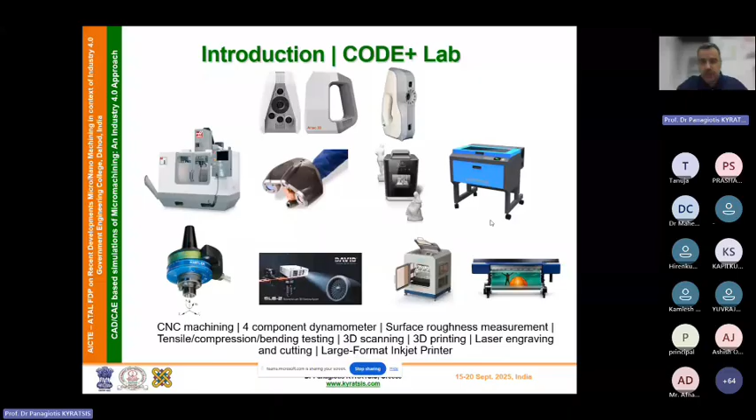We have Esko for packaging design. We use Granta as our main software for material selection, GeoMagic for 3D scanning and processing of the data, Rhino 3D together with Grasshopper. I'm going to show you some of the things that we are doing with this kind of CAD and API use, and further CAD systems like SketchUp and so on.

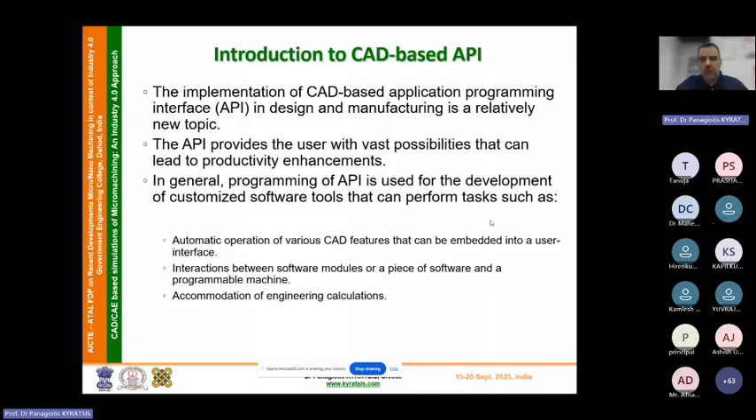And I would say that generally we use it in order to be able to accommodate a number of engineering calculations. It sounds very good to use this kind of technology in such a way in programming the CAD system. And of course, we have a number of advantages, like we enhance the productivity of the designer and the manufacturing engineer. We improve the work and time allocation.

We have a quick and easy error recognition during the product design cycle. We reduce the product development time, and this time that we save, we can use it to something which is more productive from our point of view. We can better implement the design ideas that we have in mind and better handle the product development. So it sounds very good, and probably someone can argue, why doesn't everybody do that?

Because out of all these advantages, we have a number of concerns. The first is it requires understanding of computer programming. And I would say that usually engineers, especially mechanical engineers or design engineers, they don't like programming. So this is some kind of difficulty that we face all the time. Another difficulty is that in some cases, the benefits are not worth the investment in time and resources. We can discuss that later on if you want, when it is worth it or not.

And the third disadvantage is that we have a lack of thorough training guides, tutorials, manuals, and so on. So in a number of CAD systems, the users cannot find the manuals or easy to comprehend materials, or sometimes you cannot find it at all, and you can do it only directly from the help.

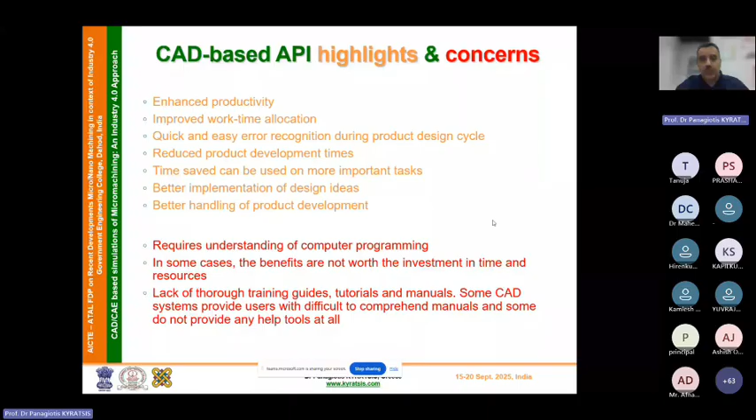So I have split my presentation in different sections. I would propose that after the end of each section, you can have some time to ask me any questions that you might have, and then go to the next one, because I'm going to change the subject and the section quite a number of times.

So at the beginning, I'm going to discuss CAD-based design and manufacturing. We have a tool which we name 3Designer tool. The version that I'm going to present to you now is a very simplified one, just to give you an idea how we use this kind of technology. And of course, we have the full version of this tool that we use for a number of applications. So the main idea is to create different modules that can be combined together in order to build a complete software tool, like the one that I'm going to show you, which is a cut-down version of the total one.

So this tool is a general platform that can aid the design engineers to face the routine design tasks that occur during the product development. And in doing that, we can facilitate time-consuming tasks and then use the time in a more productive way. And it is possible to extend this functionality to cover a number of issues. You will see more about that.

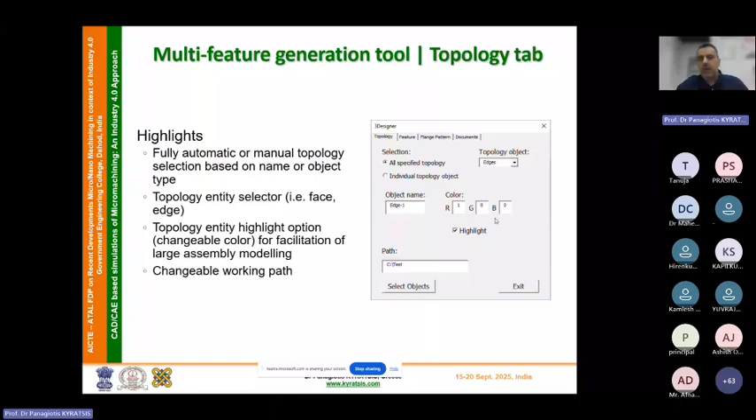So there are different chapters of how we can use the 3Designer software tool. I'm going to start with a simple one. If you go to one of the tabs, one of the things that the tool does is, fully automatically or manually, you can select using the topological names of the object. And then by doing that, we can actually apply a feature of the CAD software. Let's say, for the sake of the argument, you can paint one face. So automatically you can select a face and then you can paint it.

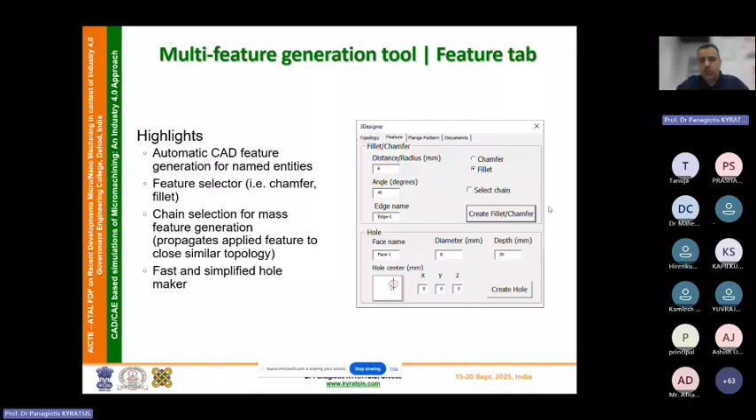There is not something really big about that, but the selection can be a hard procedure sometimes in some of the CAD software that is available. And then after we select these kinds of instances, we can automatically generate different entities like chamfers, fillets, create some holes, and so on. In this case, you can put a number of parameters here and automatically have the output on the model that you create. Like in this case, we can create some fillets and chamfers, or we can put some extra piece of information for opening holes.

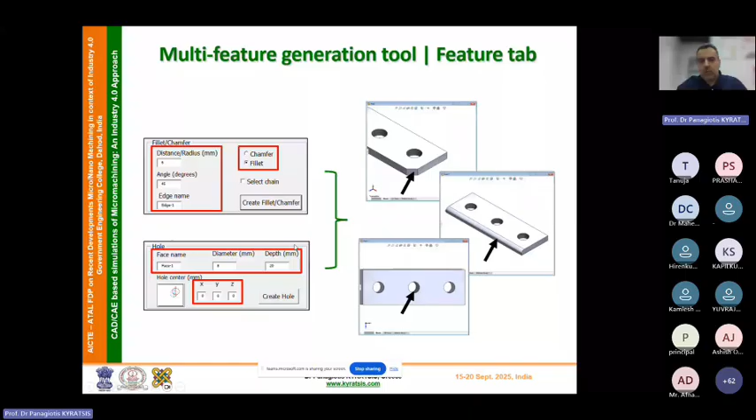But what about if we would like to have something more unusual, something more peculiar, like the flange pattern tab that we have built over here? In a number of cases, you need to build a flange and include the different parameters, or in even more cases, you need to follow some kind of an ISO standard or a standard that you would like to have, and you can select over here the size of the item or the size of the product, and then automatically the CAD is designing it for you.

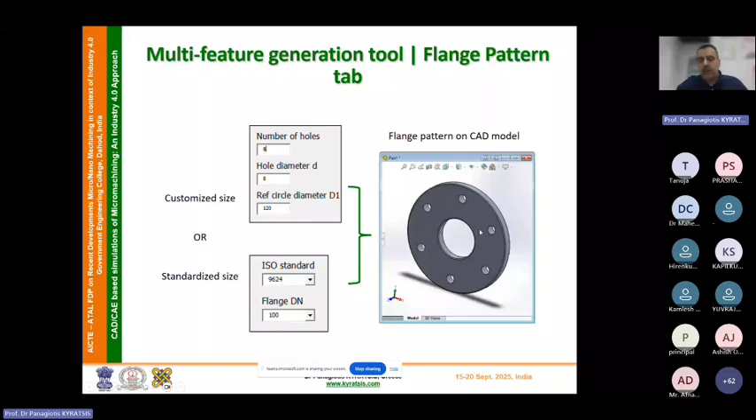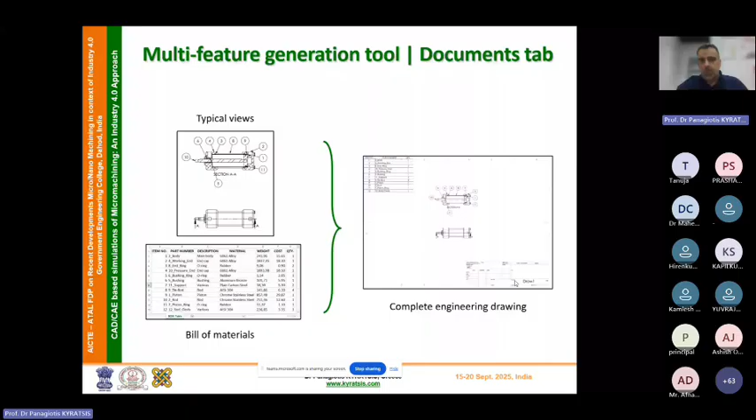So if you would like to ask any questions before I go to section 2, I'm more than happy to answer. Or if you would like to continue with all the sections and answer the questions at the end, I'm more than happy with that as well.

Hello, participant. Have you any question? Yes.

Okay, maybe this section was relatively simple. Let's go to the next one.

What about if we would like to design something more peculiar, something more advanced or difficult, somehow different? In this case, we are able to program using textual or visual language.

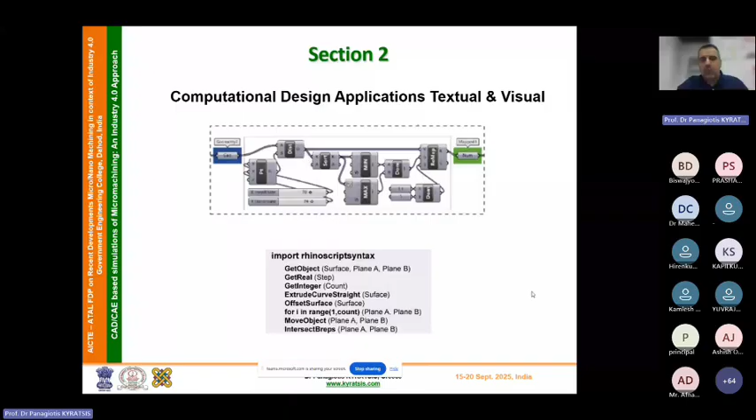I'll go a bit quickly with this, but we can use visual programming, which means that on the screen we have something like this: different boxes with input and output, and inside each box some kind of code. We use a number of libraries, and we are able to build what we call spaghetti here, the whole software. Of course, we are able to use textual language as well.

In our case, in some of the systems, we use Visual Basic for Applications. In others, which you'll see later on, we use Python, again because there are a number of libraries available, and it is very helpful.

And because we are able to use the textual language, we are able to create a new box, a new kind of function, procedure, or object, which is going to be used inside this spaghetti, but made by ourselves, depending on the application we want to run.

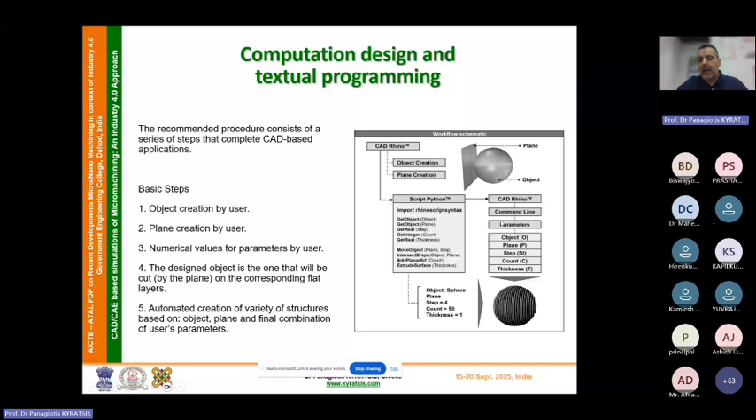I'll give you an example. We have built a small script where, when you have a little object, whatever geometry, it's not relevant in this case, and you have a plane, you declare these two objects, and then you can slice the geometry. We've been using Rhino 3D for this case study.

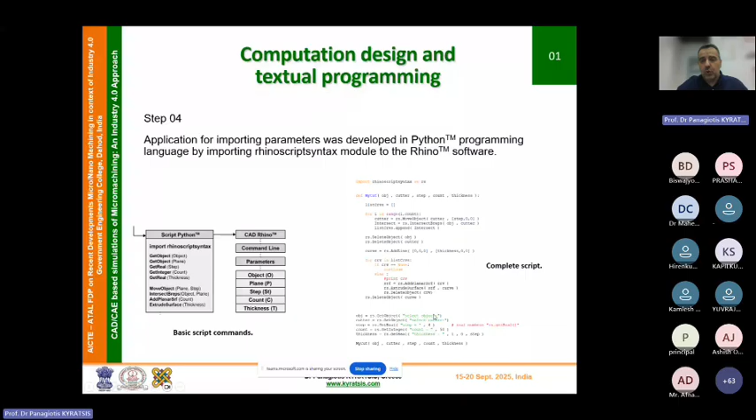We have written a script which does what I'm going to show you later on. The main idea is that you can slice the geometry with different parameters, and you can see the alternatives here on the right-hand side of the screen. This is an application we use extensively, not only for this simple geometry, but for high-level, very complex geometries, usually for the furniture industry.

And then what do you do? You can get a CNC laser cutting or a CNC machining center to cut all these geometries and then assemble the final furniture, if that's what you want.

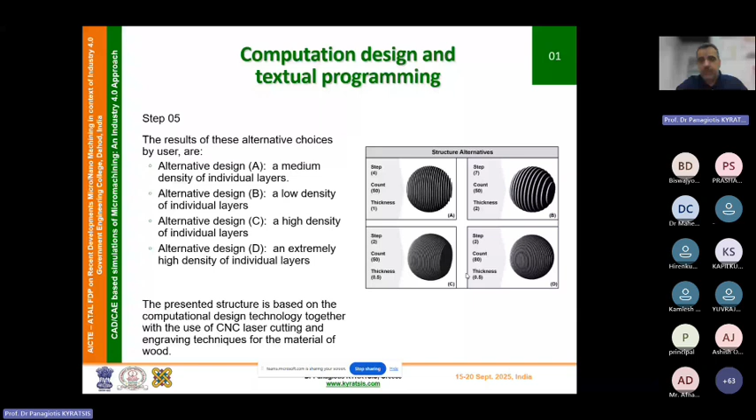Another example: if you have a surface like you see here, with plane A and plane B, the code again is written in Rhino 3D, using some kind of Python code. It takes all these parameters as input, and you get a different output every time. Depending on which one is suitable for you, you keep it.

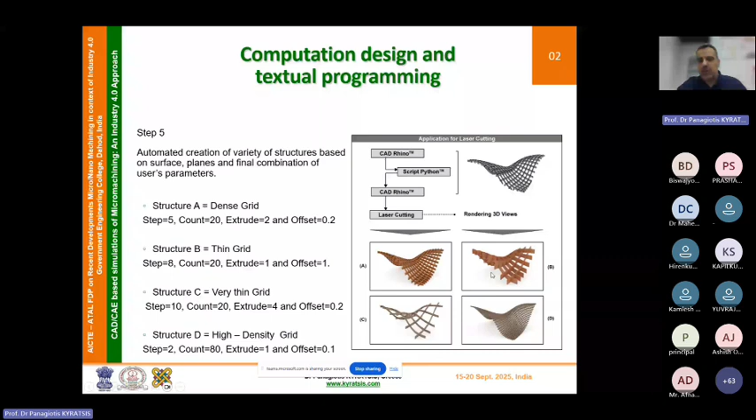For this case, again, we usually have different applications for products made of wood. You can use the CNC laser cutting technique or CNC machining.

And then, going to something a bit different, you have, let's say, a pattern here. In this case it's a very simple pattern. We create a visual code, again using Rhino, with a simple geometry for the sake of the argument.

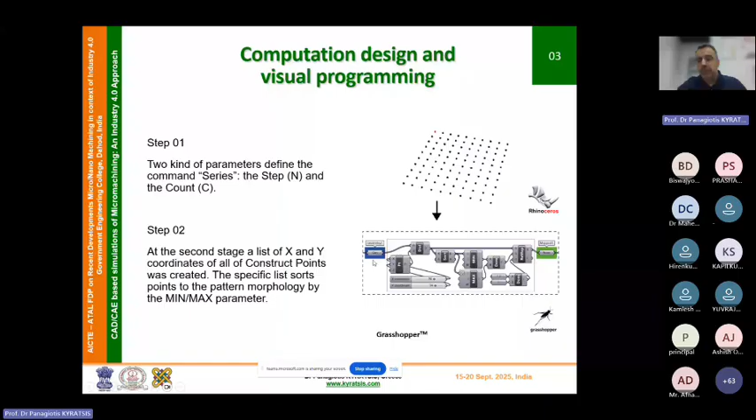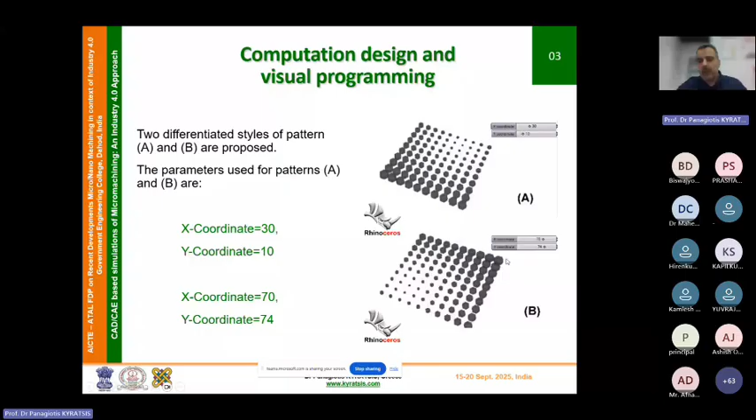Depending on what is the pattern here, we can explore different functions of the size of this geometry, which is going to be repeated. And then at the end, you find yourself having different applications, different alternatives on the patterns.

And of course, someone is going to argue, why do we use that? In our case, we use it for 3D printed plastic structures on textile. So we print alternative patterns on textile, and then you see that like that, we change the geometry and the mechanical properties of the textile itself. This is sometimes called 4D printing, if you would like to have a quick search in the bibliography.

Okay, this is section 2. Again, hopefully it was relatively easy. If there are any questions.

Yes, sir. One question what I can ask: computational design and textual programming can be used parallelly for making the object.

Actually, we started some time ago with textual programming. And then we found out that by using the visual, we had a lot of code ready for us, so it was very easy to handle. Instead of having a lot of lines in front of your screen, we had only a box that you can play with. Then we needed some extra functionality, so we ended up using visual programming to make it easy to see on the screen, while at the same time we use the textual approach to create our own boxes of functionality. Like that, we use both of these techniques in order to optimize the time we need to develop our application. This was a very good question, because we try to combine both of them. It's like a hybrid way to do it.

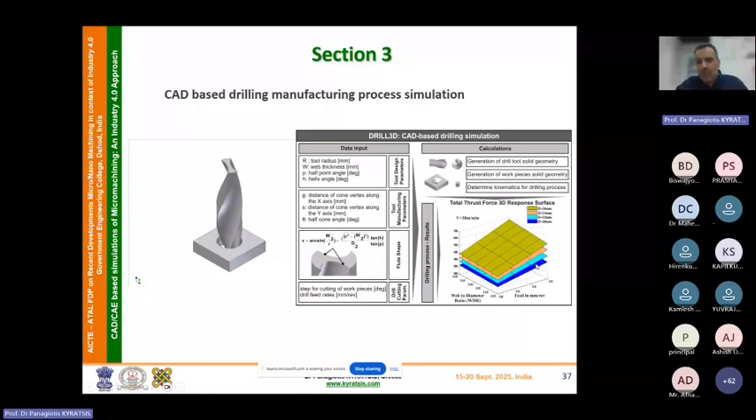By doing all these things, and if we run the software, then we end up with a calculation of the total thrust force in each case, for different tool diameters, for different feeds, for different web-to-diameter ratio, and so on, speeds and so on. So this is an alternative way, and someone hopefully is going to ask me, why do you use FEA and why do you use this technique? You have to ask me later at the end of this section about that.

Let me make some comments about it. Drilling is supposed to be a very common material removal process. Even nowadays that we go from metallic parts to composites, in order to somehow connect them, we need to do the drilling. So it's very important, even nowadays with the new materials that we use.

Unfortunately, the tool geometry is very complex. In this case, which is a relatively simple case of drilling, we have to split the cutting process between the cutting process of the main cutting edges, the lips, which are these areas here, this one and this one.

And then we have the chisel edge. The chisel edge is over here, on the kernel of the tool. And then we have the flute, which is over here. It's the area of the tool that the chip goes along in order to be removed away from the workpiece.

Traditionally, researchers have started with mathematical simulations or experimental simulations. So in our case, because we like programming in CAD software, we will use the API of a general purpose CAD system, and you will see how we handle this kind of problems.

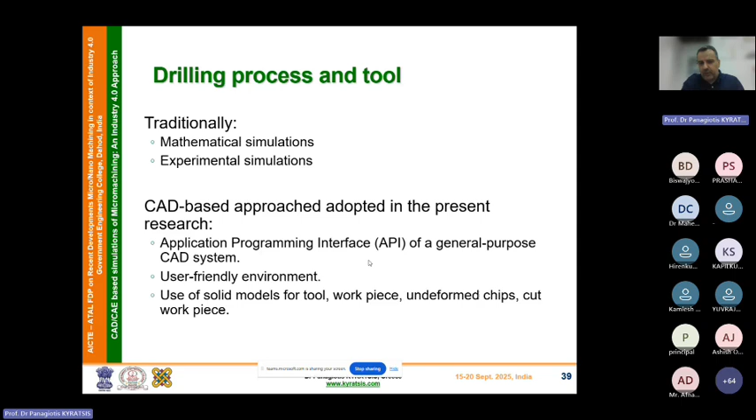Hopefully you will find our user-friendly environment, and everything that we create during this simulation are solid models - solid model for the tool, solid model for the workpiece, the undeformed chip, the cut workpiece, everything is a solid model. This is not the case all the time; we can do similar stuff by working with lines or surfaces. But in our case, for the sake of this specific simulation, we have been using solid modeling.

So we have to insert these, and one additional difficulty is all these are distances which can be found with some difficulty in the reference books. We have something like that on the screen. As you can see, we have the tool geometry and the manufacturing parameters.

Over here we have different values - how many steps should the simulation do, what is the step depth, and so on. In this case, we needed to run a lot of simulations until we optimized the number of steps and the millimeters of the depth. The same is true for the main cutting edges and the chisel edge over here, and what should be the step in degrees of the rotation of the tool during the simulation.

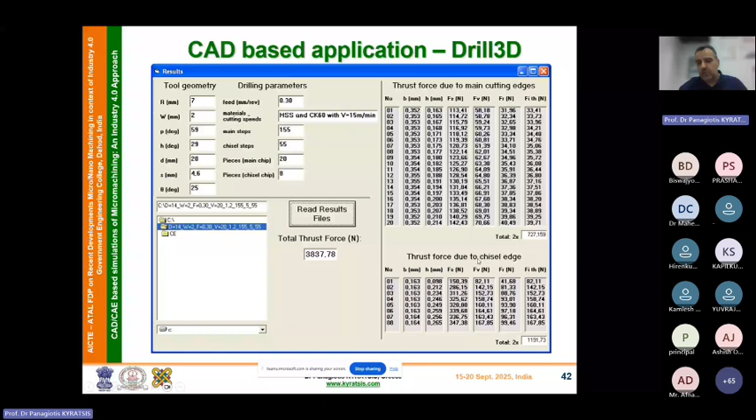Let's see a bit how it works. We put the input data as described earlier. We have the calculation of the tool itself, and we have the workpieces, and we determine the kinematics of the drilling process. Then we penetrate - we do the penetration of the tool inside the workpiece - and because it goes inside, we have to apply a Boolean operation, which means that in the area where we have a common volume of both the tool and the workpiece, we can have what we call the undeformed chip. This happens for the main cutting edges or the chisel edge.

I will concentrate a bit more. You can see over here the drilling tool, which goes inside the workpiece. There are a variety of parameters. When it goes inside, and after some time, in order to be able to achieve a steady state simulation, we are able to cut this undeformed chip, as you see it over here.

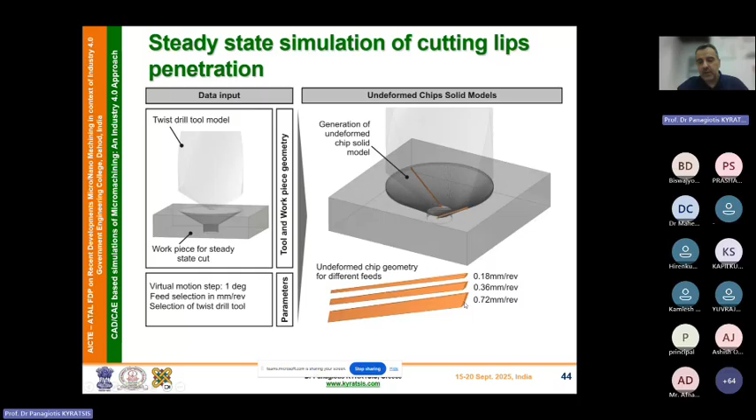And depending on what is the feed that we are using, you can have different variety of dimensions on the undeformed chip. This is for the simulation of the cutting lips penetration. Let's see now the little video, which is going to be more understandable for you, I suppose. You see, it penetrates inside the geometry, the tool, and then creates the hole.

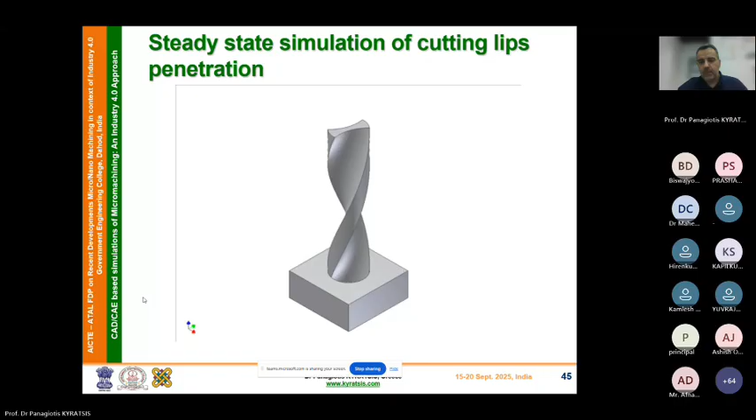The same happens if we go to the chisel edge area, because this little cylinder that you saw earlier on, it's only for the chisel edge here to cut, and as it penetrates inside the geometry of the workpiece, then after we achieve the steady state simulation, we are able to see over here the undeformed chip.

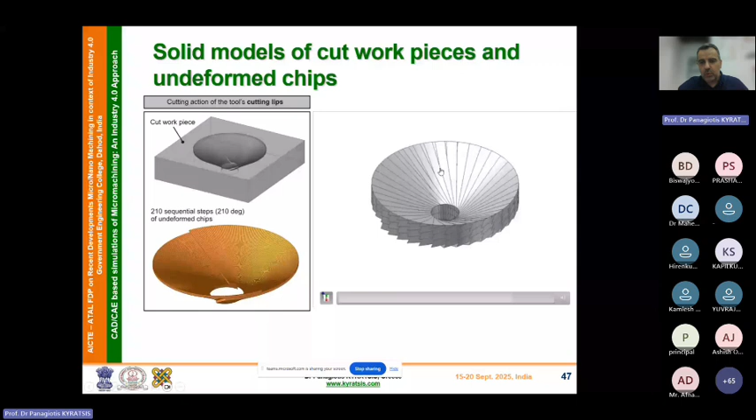And why this is very important, you saw that over here, depending on the parameters, we have to optimize the degrees and so on, which are probably details for you at the moment. But I have prepared some videos over here. If you think about the undeformed chips, how they are removed from the workpiece, there is this little video. After the tool is penetrating inside the workpiece, this is what you subtract every time. And then the same is the case for the chisel edge area.

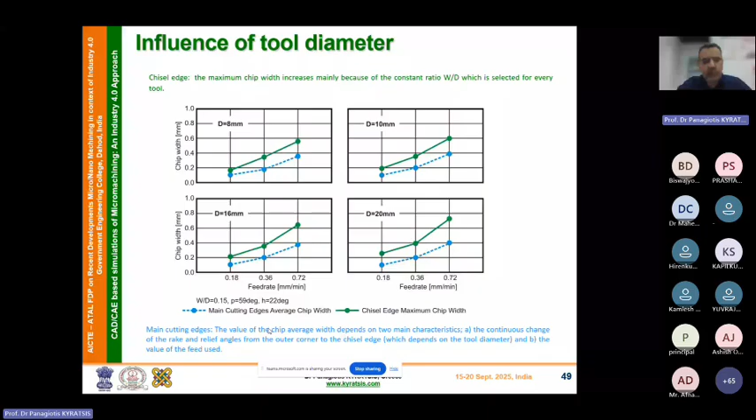And then we are able to automatically calculate the size of the chip, the undeformed chip. And you can see over here with the green, we have the chisel edge, and with the blue, we have the main cutting edges. And depending on the feed rate, we are able to calculate the chip width depending on the diameter or depending on the web thickness.

And when we talk about the web thickness, it is how big is the center, the kernel of the tool, and some manufacturers wanted these to be very thick, very wide, but in this case, you need higher force in order for the drilling to happen. If it is very small, then there's a high possibility for the tool to break. So somehow over here, you need to do a compromise to have a web thickness which is thick enough to withstand the load, while at the same time, we have lower forces for creating the drilling, creating the hole.

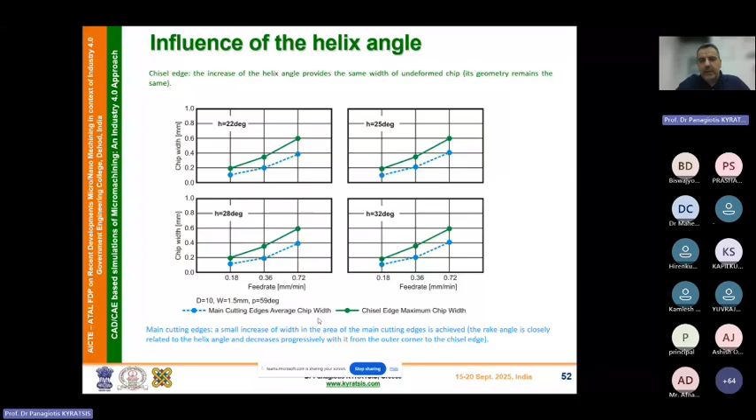The same, we have the results for the half point angle, the nose of the tool, again, similar results, or the helix angle. If we change the helix angle, then we have a variety of geometries of the chip. And someone will argue, why do I need the chip? So now it's a surprise, because in order to be able to calculate the forces, to do the simulation, we need to have the dimensions of the chip and then apply what we call the Kienzle model, the Kienzle formula.

This Kienzle formula, I have it over here for you, for your reference. It has the dimensions, B and H are the dimensions of the undeformed chip. And there are two coefficients, K and Z, which usually you find in a database, and they relate to different aspects like material, manufacturing parameters, and so on. So in our case, we are going to find the dimensions B and H, while at the same time from the database, we can get the K and the Z in order to find what is the force.

And then to be able to find over here, what are the forces on the lips here and there, and what is the force over here on the chisel edge. So after we have these, you see that we have cut them into pieces, and we calculate the different B and H every time, and then find the Fi thrust of this little specific undeformed chip. If we go up to the end, we will be able to calculate all the thrust forces here and then sum them together over here. And because we have two cutting edges, in this case we have to multiply it by 2.

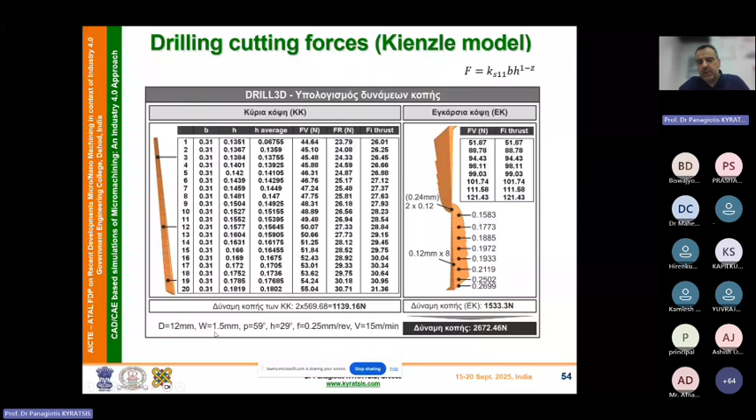So this is the end of this section. Hopefully this was a bit more unusual for you. If you have any questions, you have to ask me why do I use CAD-based simulation instead of finite elements.

Okay, the simulation, the CAD system that we produced, the Drill 3D, was part of Inventor of Autodesk. So we program it in Visual Basic for Applications of Inventor. For the composite materials, as long as we have this database, as I said, we have to apply the Kienzle formula. As long as we can find these kinds of values in the database, we can do it. The Kienzle at this stage, usually they use metallic parts, like different metallic parts. Nowadays, yes.

Just I have also one question. Sir, when we make this simulation, during the modeling of the twist drill geometry, are we considering the reduction on the flute length? Because that affects the generation of chip friction between the chip and the flute surface.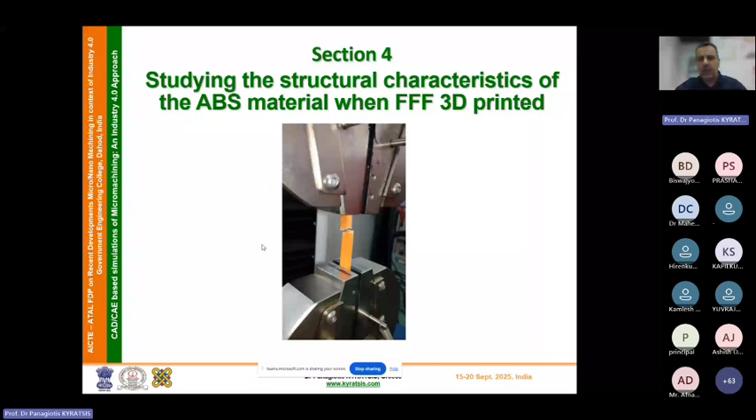In this case, probably this is something that all my colleagues and my students like, 3D printing. So what we try to do nowadays is study the 3D printing properties. For the case study I'm going to present today, we have been using ABS, which is an ordinary material, with an FFF printer, and try to see the structural characteristics of the geometry. Let's see how it works.

So we have been using ABS, and in order to study it and make the model of it, we use a shallow neural network. So again, over here, we come to CAE in a different way. Someone would expect to see finite elements only, but this is a different CAE way of modeling. And the whole goal here is to investigate 4 structural parameters on the generated S to M ratio.

And what do we mean with S to M ratio? Usually, if you search the topics of this area, you will find that people do tensile testing and get the strength. In our case, we took the ratio of strength divided by the mass of the item, because apart from having the manufacturing parameters for high strength, sometimes we need to have the lowest mass possible with a higher strength. So you see that these two results contradict each other, and this is very interesting. That's why we got this S to M ratio.

We used the design of experiments technique, and for this we used the central composite design. We had 4 structural characteristics, and for each characteristic we had 3 levels. By following this CCD algorithm, we needed to perform 31 tests. And in order to see that we don't have any problems with the testing, each test was measured twice, to see that the result we get appears well both times.

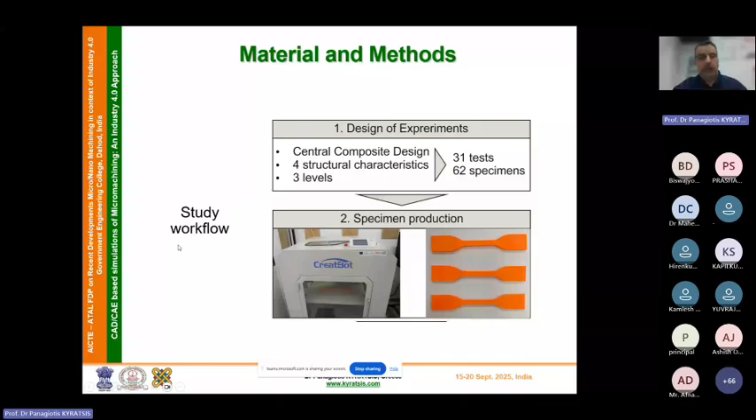We have all the specimens over here. We'll see later on that we measured the weight of each specimen, and then we did the tensile test. And then we study the workflow. We have all this neural network modeling with this hidden layer. Over here, we have the 4 structural parameters; we'll see them later on as well, and we have 3 levels to each. And over here we have what we call the constant fabrication parameters, and these are the structural parameters that we were changing.

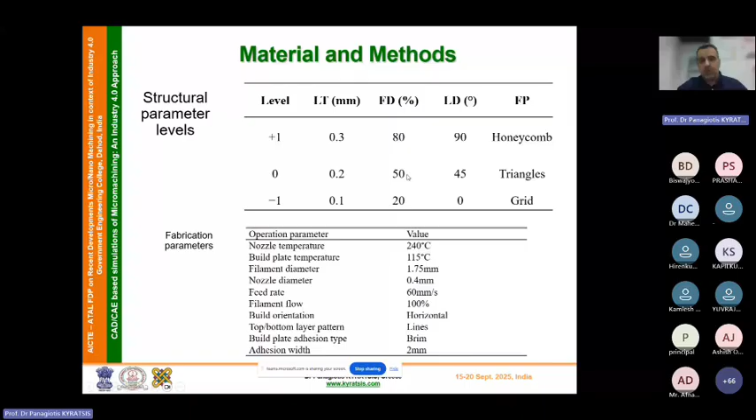The specimen had a geometry following the specific standard for the dimensions. Here you can see the different values of the layer: 0.1 millimeter, 0.2 and 0.3, and how this appears on the screen when we create the model and the code to be manufactured on the 3D printing machine. We have the infill: 20%, 50%, and 80%. And you can see over here the difference in the geometry which was built before testing.

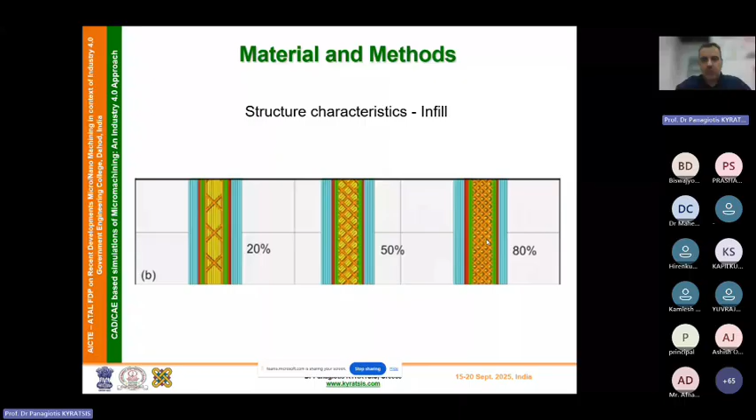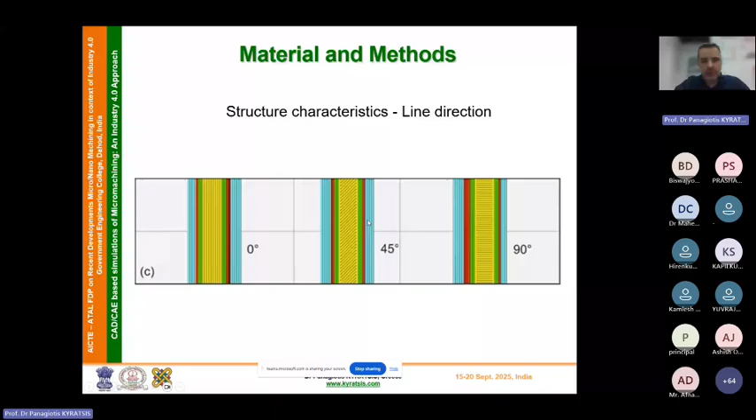Then we have the line direction: 0 degrees, which means printing along the testing specimen, or 45 degrees, or 90 degrees. I will tell you the results later on, but someone would expect this to be the strongest, this the second strongest, and this the least strong. And then we have different patterns. We tried grid, triangles, and honeycomb as different pattern structures.

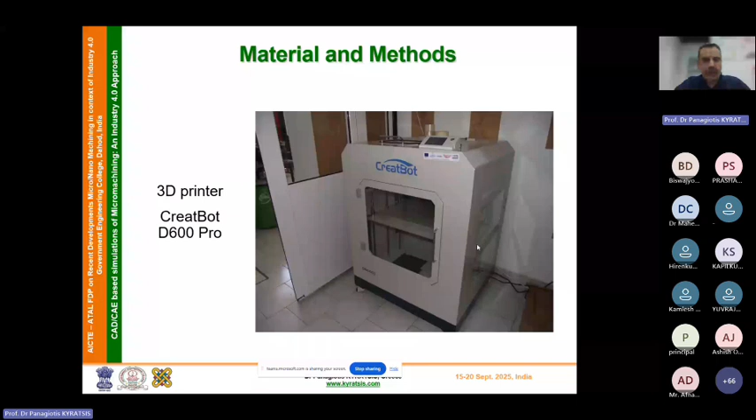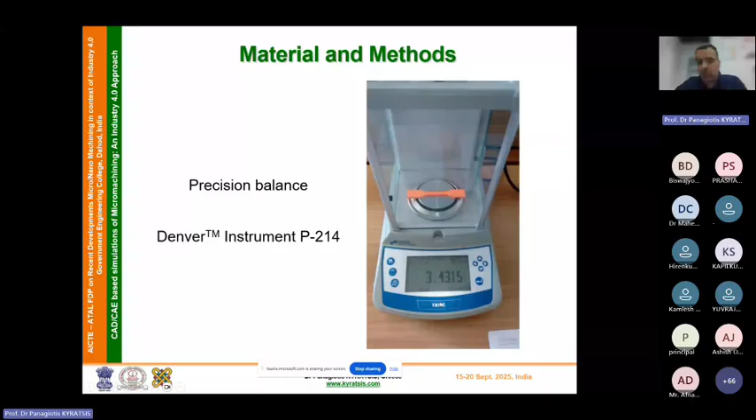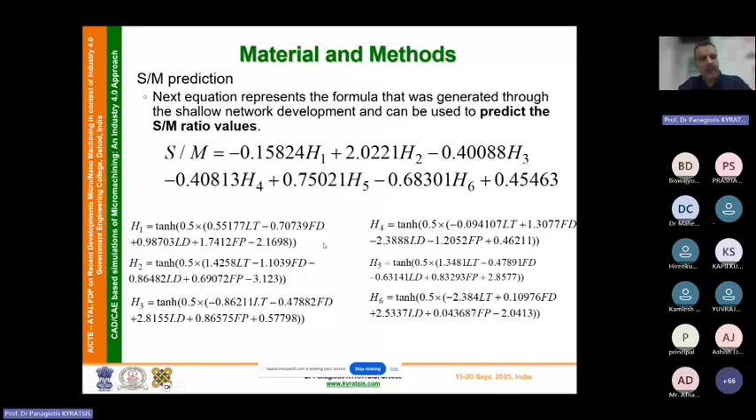And then some trials over here. As I said earlier, we measured the weight of each specimen with very high accuracy. Then we built a neural network. We decided which one was best compared to the R value over here, selected it, and built the neural network. We did some normalization of data; I'm going to skip all this. We create the function, and each function has some coefficients; you can see them over here. I'm sorry. And then we did the network evaluation for the training, the validation, and everything.

So the conclusion is that the layer thickness is the most influencing factor; we saw that on the graphs earlier. The direction of fracturing is directly affected by the line direction. As I said when presenting the parameters, 0 degrees is responsible for higher S to M values. And the influence of the infill density indicates that both 50% and 80% have almost the same influence. You saw it over here.

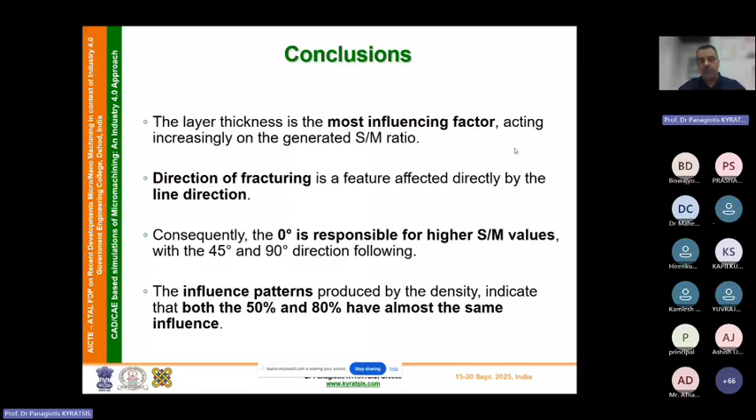And then the general conclusion is 20% density contributes towards the achievement of higher S to M values. The honeycomb was determined to be one of the yielding the highest possible S to M ratio. And finally, the results of the neural network model was very accurate, up to 1% of difference. The error was very small, up to 1%.

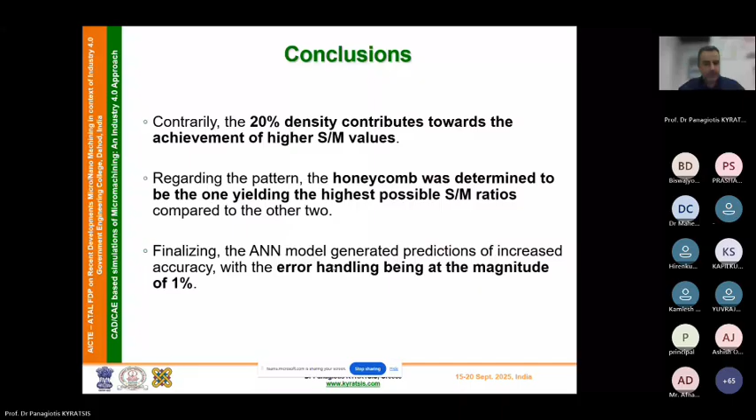I'm sorry. So if you have any questions now, I think we went to something which is a bit more fancy, a bit more, I don't know, what you would expect me to say in this presentation. If you have any questions, or you saw the finite element that you want me to go further with that.

We haven't tried to compare different design of experiment methods, but it seems like up to now, every time we have been using different methodologies, we achieve very good results. But maybe this would be a very nice opportunity for us to check the comparison with the same experimental results, to check the different design of experiment methodologies. It's a very good idea. I'm sorry, we haven't checked it, but it's a very good idea for future work.

Okay, probably there are no other questions. Okay, let's go. It's something which is a bit more fancy, but it's more difficult. Let's see how do we connect CAD-based programming with nonlinear finite element machining. Okay.

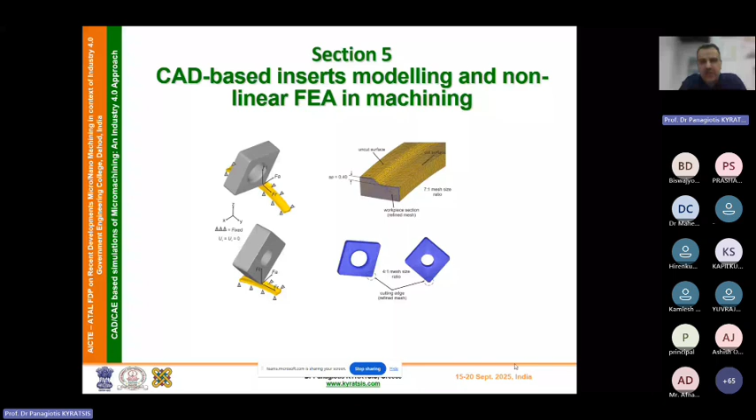This is the layout of an application that we have built based on a specific standard for turning inserts. And then you will see later on how we can change all these parameters to create different inserts. So in this case, we use different geometric parameters for creating turning inserts.

This is an insert. If you go over here and you actually zoom in, you will see that there are some chamfer width and some chamfer angle. And then we can use that. Again, we have different geometries. These are more micro geometries, and these are more general geometries, angles, and so on.

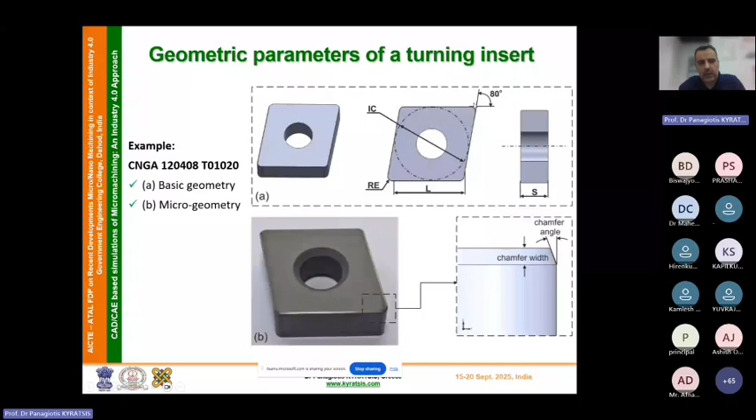And what we have done is we use SolidWorks API, which is mainly a VBA kind of application, in order to parametrically design the turning inserts. And these turning inserts were based on this specific standard, as you see over here.

And when you have this application here, there are a lot of buttons to press, but generally speaking, what we do is we have to select over here what kind of shape and length we would like, what is the thickness, the nose radius, the clearance, the clamping system, and so on. We have over here some cutting edges and so on. There are different variety of inputs that we need to put, and you can see over here all the alternatives that we can select in order to produce a specific turning insert.

And of course, we can save it in different formats. In a number of cases, we prefer to have it as an STL. And then we can over here say where to be saved in order to find it. And then you can just click Design Insert and you have it. And you have over here the code, with the colors. Let's see a little video, how it works.

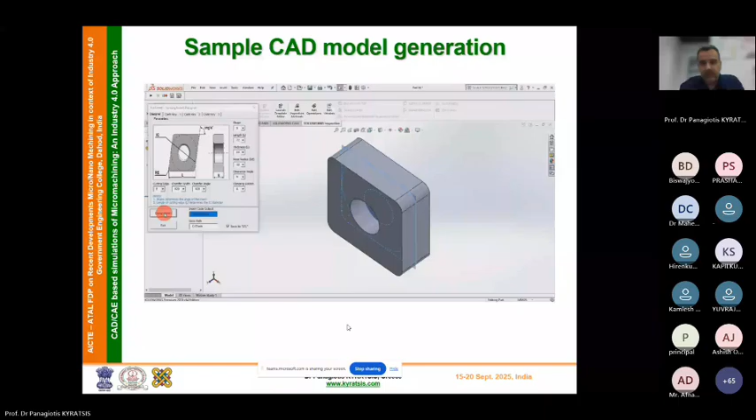So, okay, we have these applications that create FEA-ready turning tool models. And then what do we do with these models? In our case, what we do is we import them into Deform 3D. This is a piece of software that I told you earlier on. You can Google it. It's very impressive to have this kind of software.

We have been using that for a number of years, and it's quite accurate. It needs a lot of experience in achieving accurate results. But at the end of the day, we can actually generate FEA models based on the parts that we design with the application that you saw earlier on.

So the result is something like that if you use it for turning. So again, turning is one of the most common machining processes used to produce parts, especially axisymmetric parts in the industrial sector. Accurate prediction of the generated machining forces is a key factor that can lead to cost reduction.

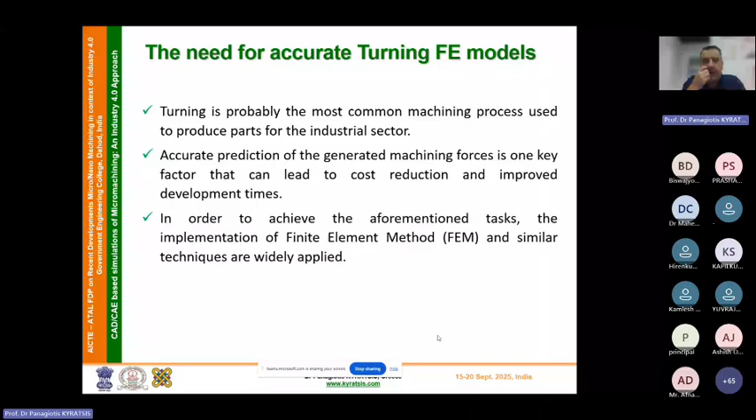Not only cost, but at the same time to have a better quality of the surface produced. And in order to achieve the aforementioned tasks, the implementation of finite element methods and similar techniques are widely applied. And this is what we're going to do.

So we can follow two paths. A 2D analysis is usually very good when we have some analytical rigid parts, and we can reduce the calculation time. It simplifies the mechanical problem and is ideal for preliminary simulations. In our case, usually we go for the 3D analysis, although on a number of occasions we have done a lot of 2D analysis in order to find some parameters that we need for the material.

But generally speaking, we would prefer to have the 3D analysis, which produces results closer to the real condition at the cost of computational time. It uses the full geometry of a tool and is ideal for complicated simulations, especially when we go to all these machining kinds of processes. In our case, I'm going to show you some turning process.

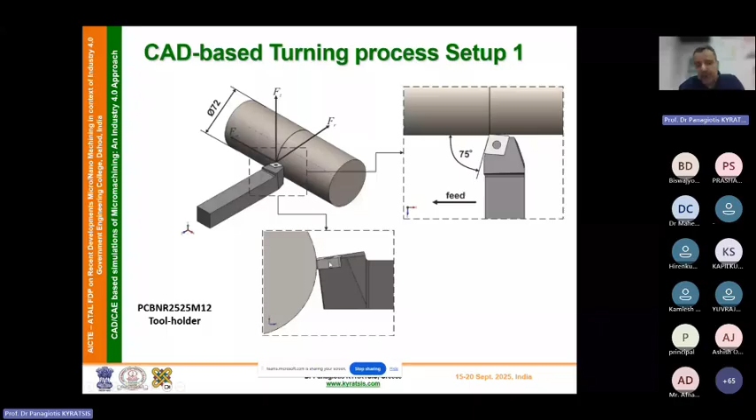You can see that we have a specific tool holder, while at the same time over here we are positioning the insert designed as I showed to you earlier on. And then in this case we can have another piece of insert, and again the holder. We can keep the same holder in this case if we have the same insert, or change it. You will see later on.

In our case, we have a cylindrical workpiece with a diameter of 72 millimeters, and our aim is to calculate different forces. And as you will see over here, we have different tools and different holders. Generally speaking, we'll see that this tool is square and this one is rhombic. And we will try to compare using one or the other, what is the advantage and so on.

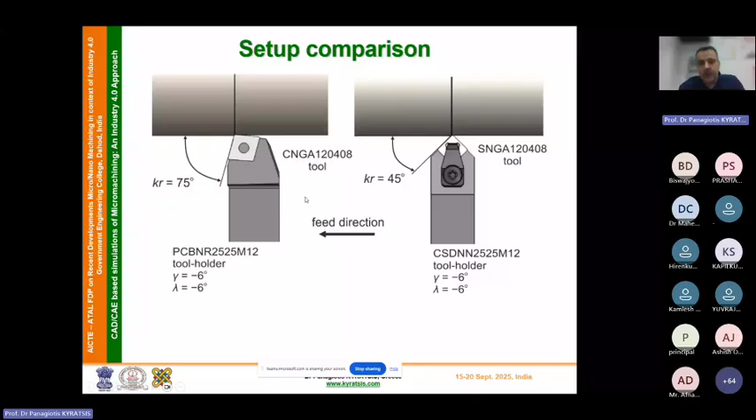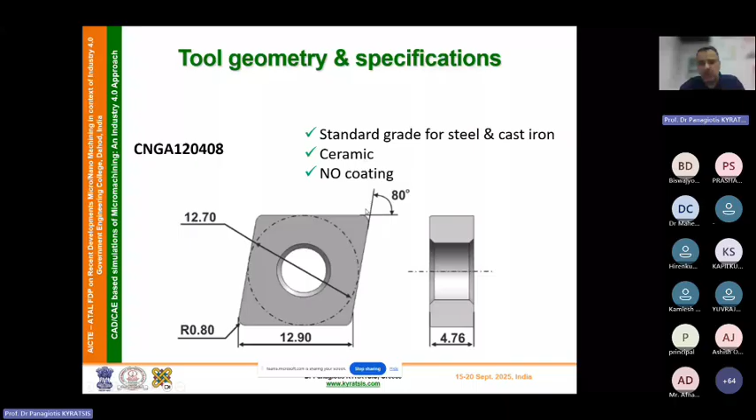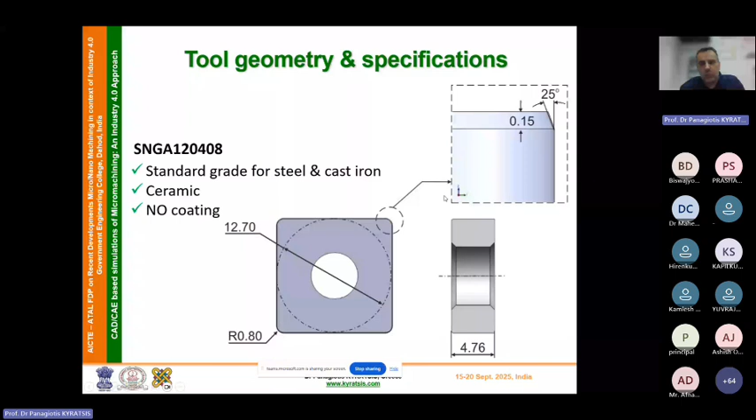So in this case, you will see that we have this rhombic tool. We have all the dimensions. This is a no-coating ceramic tool, and it is designed to deal with standard grades of steel and cast iron. And these are the dimensions as you see them over here, following a specific standard. There's a similar geometry over here with a lot of details, these micro details, about the square tool. And then we have the different tool holders.

And let's go to the workpiece specifications. It's an arc-shaped part of a cylinder. You will see on the next slide what I mean by part of a cylinder. The material is the one that was specified over here. The cylinder diameter is, as I said earlier on, 72 millimeters. But this is the one that we are using. If you see macroscopically, this would be the workpiece that I would like to have.

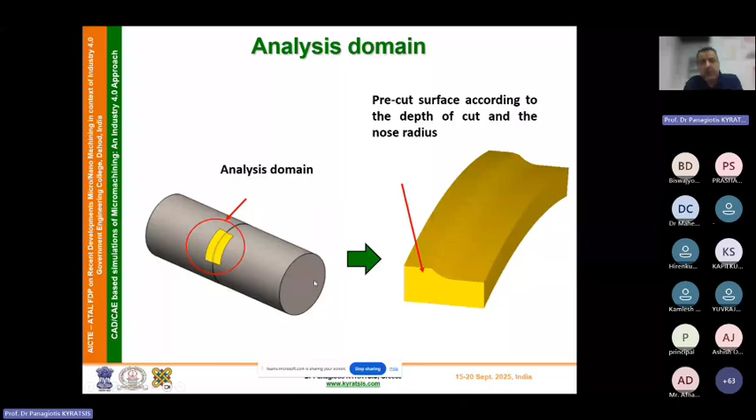But instead of having all this, since at the end of the day the tool is going to cut only in this area, instead of meshing the whole geometry, I'm getting this little yellow part, having it over here, and actually cutting this area using the finite element method, and then seeing the results, instead of meshing this whole very big geometry, which is not going to be used during the cutting process. And here you can see how we develop the chip in this case and the other case, together with the forces.

Again, over here you see that the depth is 0.4. I'm going to mention it later on. In this case, we have specifications like the rigid tool meshed with approximately 50,000 tetrahedral elements, the finer mesh at the tool nose having this 4:1 size ratio. We have a plastic workpiece, arc-shaped, part of a cylinder with a diameter of 72 millimeters.

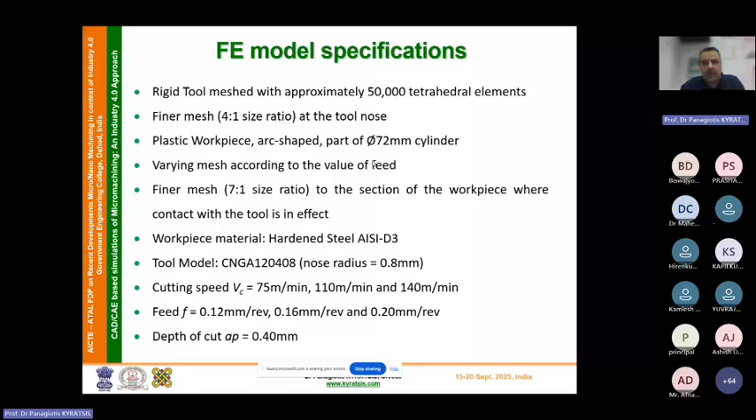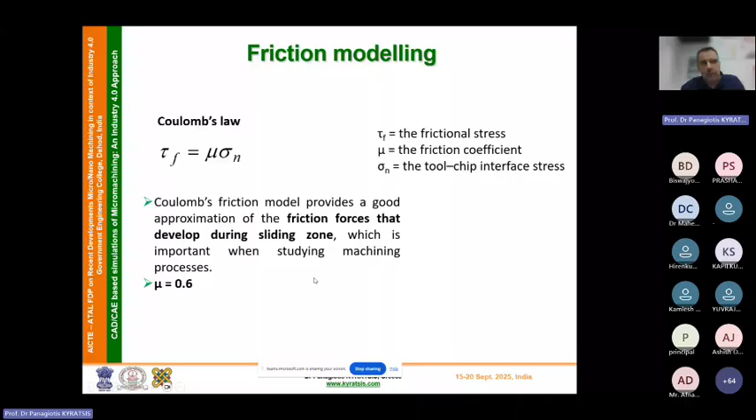What about the boundary conditions? The workpiece was fixed in such a way so that the velocity of the nodes for X and Z axis was equal to 0. The tool was allowed to follow the path - you would expect that angular part, this cylindrical path, as I showed you earlier on. Something very important is the heat exchange with the environment, so boundary conditions were assigned to all the surfaces of the workpiece, so all of them were exchanging heat with the environment. And the master-slave contact relationship was set to the workpiece and the generated chips.

So I'm going to show you first what is the simulation. You see the different steps every time of both the tools, the rhombic and the square, and you see the different steps. For those who are a bit unfamiliar with that, each step is running the model, the FEA model, again and again by changing the geometry. Usually when you use finite elements, linear finite elements, it means that the geometry has relatively small changes.

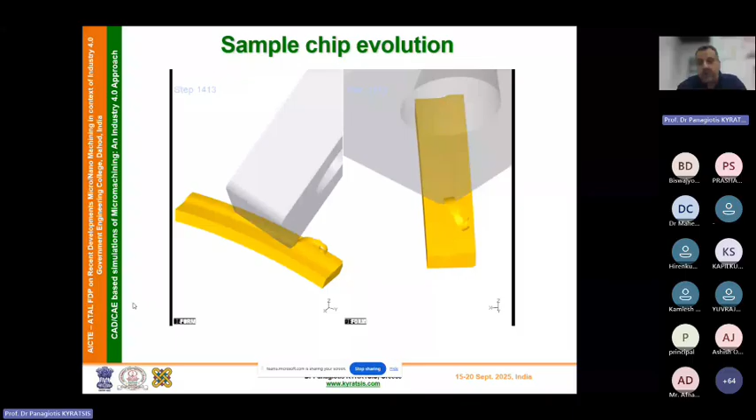In this case, where we produce the chip, you see that we have a very large deformation. That's why the software needs to stop, regenerate the mesh based on the new geometry which changed, and then remesh and solve the problem again. So someone would expect over here that 2,000 times the model was remeshed and resolved again and again in order to produce this simulation.

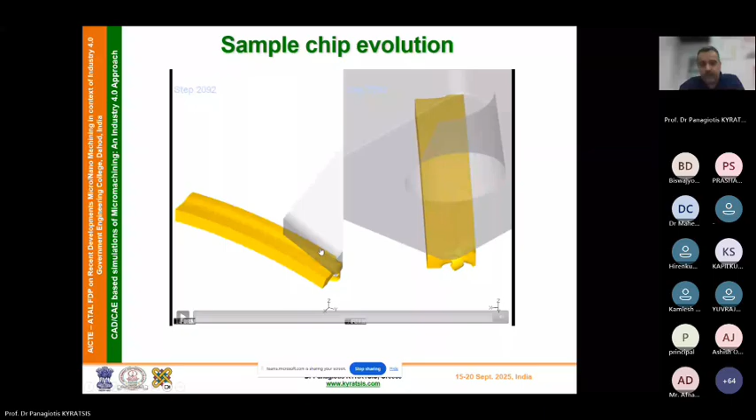I have saved some of the images over here, depending on the tool that we are using, different steps all the time, and you can actually see what you saw earlier on the video on the moving simulation. You can see over here how the chip is developed on the different steps of the simulation, so you see the chip morphology. In our case, usually we do the same experiment in our own machinery here, and then we see that it's exactly the same, or we get the feeling of it.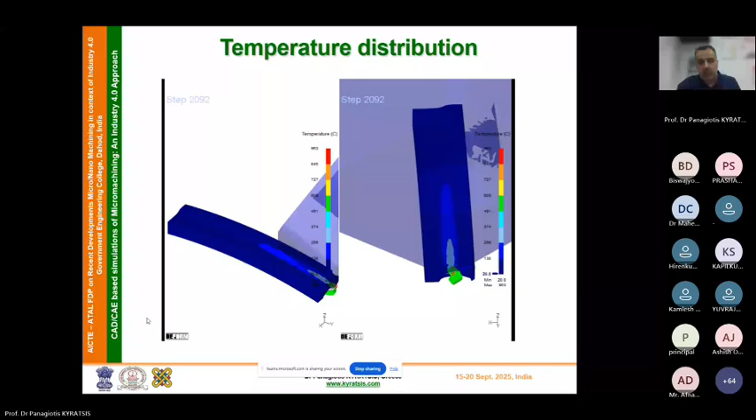Again, lots of steps, 2,000 steps in this case again, and you could actually see how the chip was removed. And again, over here we have some pictures of the simulation in the different steps with the temperatures for this step, depending on the velocity and so on.

And then that's why we have some results, some conclusions: the radial force is the component that affects most the resultant cutting force for both tools. The developed machining forces are higher when using square inserts. So by comparing all these, this is some kind of the result, the outcome of it, with the exception of the feed force, which is about the same for both cases. Increasing cutting speed decreases the percentage of increase, whereas the same effect applies with a feed increase. The temperature distribution seems to be spread to a larger surface when rhombic tools are used. And finally, both rhombic and square inserts produce approximately the same temperatures when we have identical cutting conditions.

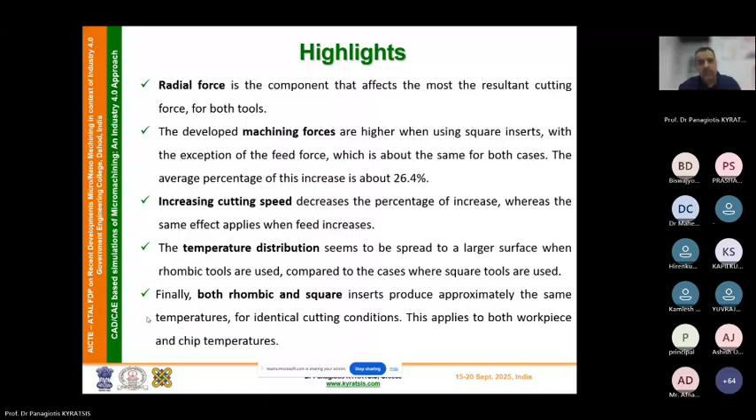It would be a very good idea to start playing with mesh-free FEA tools. We haven't done it up to now. We have put a lot of effort into using Deform 3D because it's one of the tools that took us quite a lot of resources from our laboratory. It was relatively expensive to buy and to maintain the license, so we try to make the best use of it. From this point of view, we haven't tried this mesh-free FEA approach, which would be very interesting, I suppose. I have seen in the literature some results that seem to be accurate enough, but I don't have any experience in doing that.

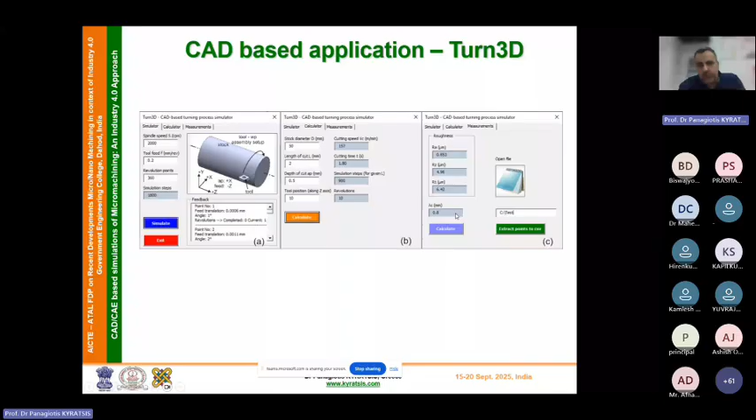By doing all that, at the end of the day, you end up with the roughness. How is it possible to get the roughness? I'm going to show you here. Let's say that we have this little bit of the cylinder, and then we have the tool over here.

And then what do we do? We move the tool around, and then start subtracting the geometry from the area of the turning of the cylinder by doing the turning. And you see over here what is the profile that you will get at the end, and you can see the topography as well.

And you can measure different parameters for surface roughness. You do that on the CAD system by subtracting the geometry of the tool, in this case the insert, from the workpiece. By doing that, you get at the end this kind of geometry, and you have all these measurements, which you can save at the end as values saved on a text file.

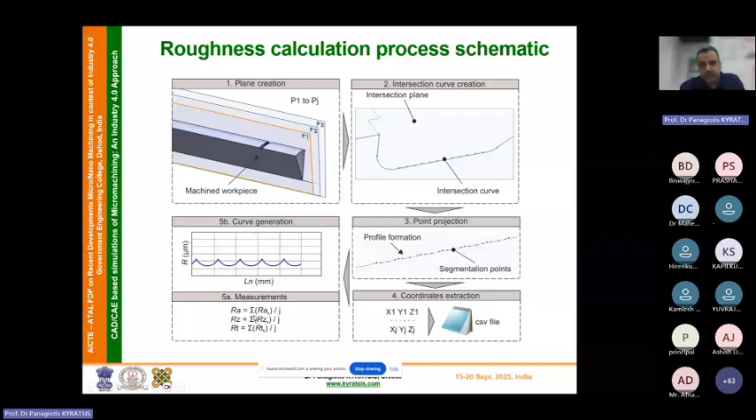As you will see, you can do that with a variety of different inserts. So as long as you have the program to create the inserts, and the program to move the insert around the cylinder—which we are not actually using, as you saw earlier, we are using only a piece of it—we are able to combine both CAD-based applications in order to solve the roughness.

And then, because I'm going to have the same question later on: how do you verify what you have found? We go through creating samples experimentally. We cut some samples and then measure them. As you see, we create the samples, then measure them and get the values.

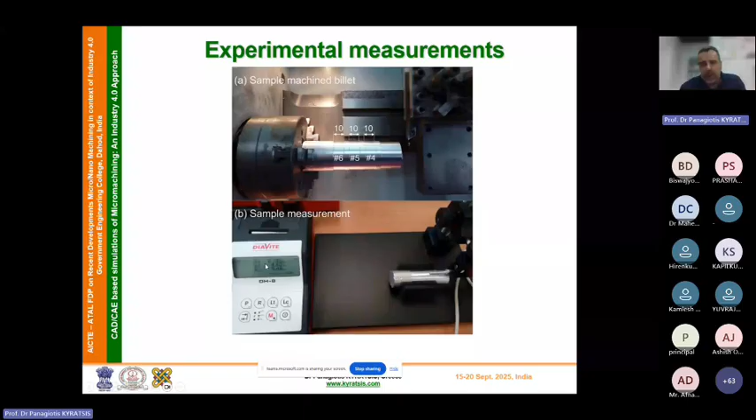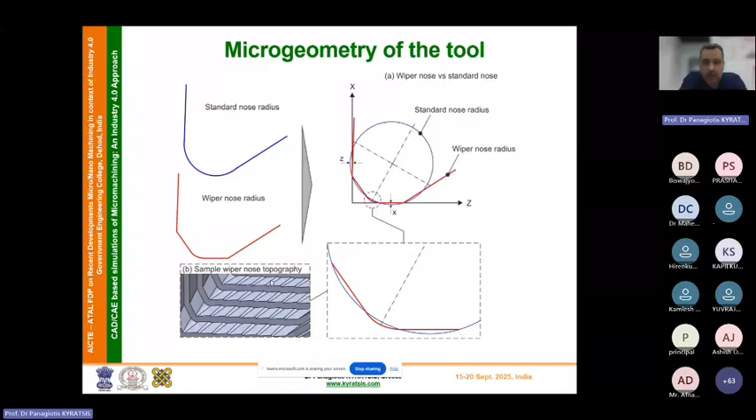And then if you go to the microgeometry, you can see the tool, depending on the nose—if you want the standard nose or the wiper, and so on—you get at the end a different topography. Like if you use a wiper nose radius, the topography is quite different. But again, this is part of making the CAD system and all these Boolean operations work for us in order to do all the maths.

So an alternative way to calculate the surface roughness using a CAD piece of software. Any questions on that?

Okay, I had prepared the presentation up to here for what you would expect me to show you, but I have more chapters because I see that we have 10 more minutes. If you want to go through something closer to 3D printing applications, and how we use CAD-based programming for 3D printing, we can go through another application, or if you'd like to stop because time has passed, I'm more than happy to stop.

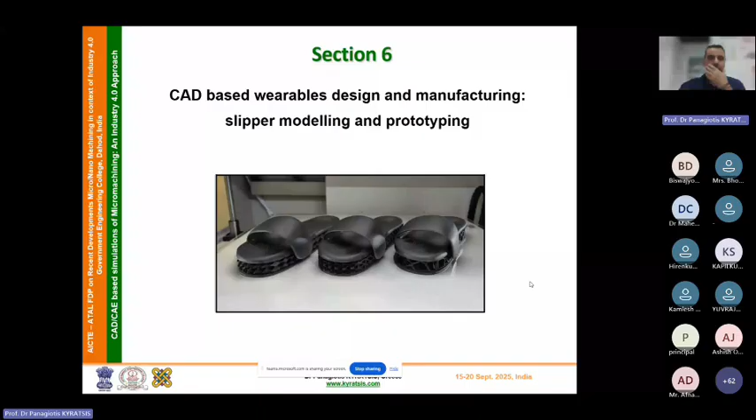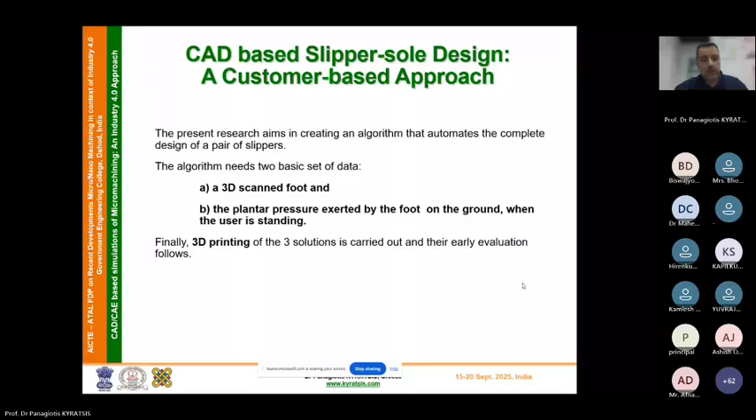So the problem that we have is to create an algorithm in order to automate completely the design of a pair of slippers. And for doing that, we need two sets of data. One is to have a 3D scan of a foot, my own foot or my students' or a foot. And then we need the plantar pressure exerted by the foot on the ground when the user is standing on top of it. And then we are able to 3D print these solutions.

I will skip the details, but the main idea is to be able to somehow write a piece of code that creates geometry. You see the geometry here, how it works in 2D, but later on I'm going to show you the 3D application of that. By having different structures, we are able to insert the different geometries inside the space, the 2D space in this case, and to repeat this shape again and again, and then try to deform this

geometry. Although it looks very easy to do that in 2D, we'll see later on when we go to 3D, then it becomes more peculiar to have a 3D structure, which is going to be used later on, and so on. I will skip the details of the geometries. I will show you how it works.

So I have over here the pressure, how do I stand, and what is the plantar pressure map of the user. And then by having these from the doctor or from the machine, we are able to read it, to recognize the areas, to find which are the coordinate points of the high stress, and then create this geometry.

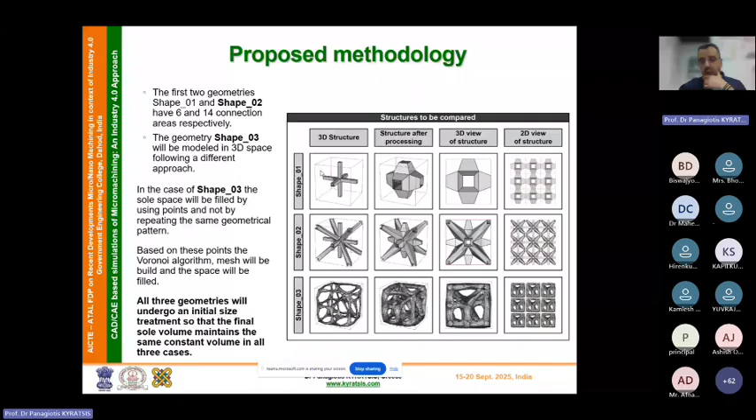And then by having this geometry, usually this geometry is not stressed, or let's say homogeneously surrounding the whole. We don't have any, how to name it, we don't have any deformation. But somehow we need to deform it: over here we have a high pressure, we need to deform it and have more material here and less material here where we don't have any pressure. And this is what we are trying to do.

In this case, we have the initial mesh, having the three geometries as I showed you earlier on, and the deformed mesh, depending on where exactly the user had the high pressure on the slipper. As you can see over here, we have the foot, we have the slipper over here, which is designed. So apart from having the different deformations because of the high pressure, we need to have the feet of the user. And this is what we are doing.

We scan the foot, and apart from having the initial shape, having the second with the auxiliary shape, this sandwich kind of geometry, we have the scanned foot. So over here you can see that this is dedicated for this specific user.

And then we are producing the geometry here, not only by filling the initial mesh, but by having the deformed mesh, depending on the map that we got with the higher stress for each user. And we have produced these three different shapes, which belong only to the user whose foot we have scanned and whose plantar map we have got.

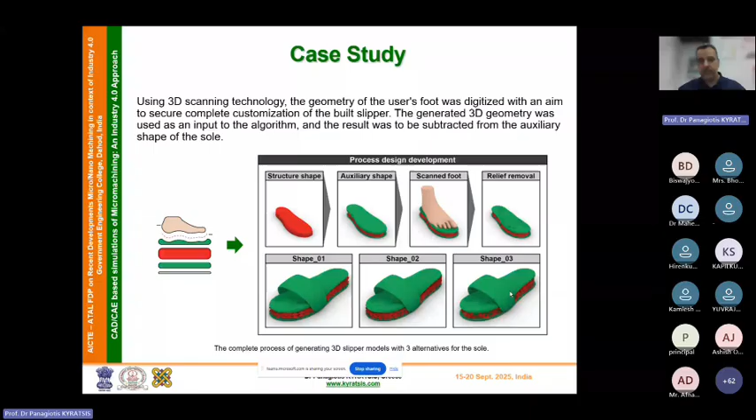And then by having this printed on our 3D printer using TPU, we gave it to the user and said, okay, would you prefer this one or the other? And for this, we have different questions for standing position, normal walking, fast walking, and so on. We have different criteria of comfort, stability, pressure uniformity, and the final result.

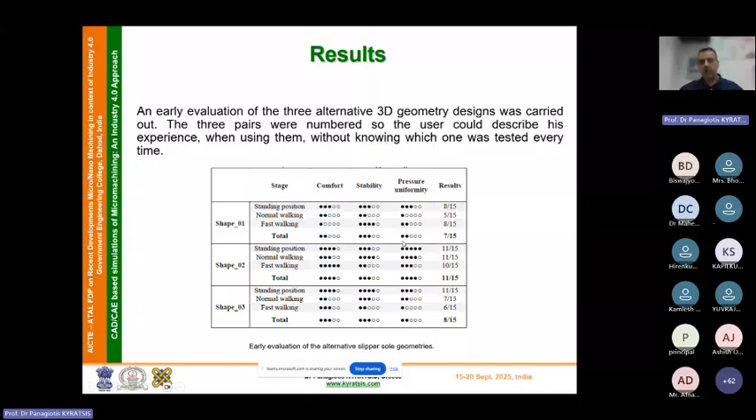So at the end of the day, you could see that this shape had more points depending on the comfort, stability, and pressure uniformity. And this is the result. I'm going to skip the details for now.

So you saw that at the end of the day, we can use this programming interface of the CAD in order to create geometries which are packed inside the product. Like in this case, we had the slippers and the bottom of the slipper, and increase the easiness of using the product by developing this kind of applications. And again, this is a CAD-based application, which is based on visual programming together with some textual programming, which has been incorporated.